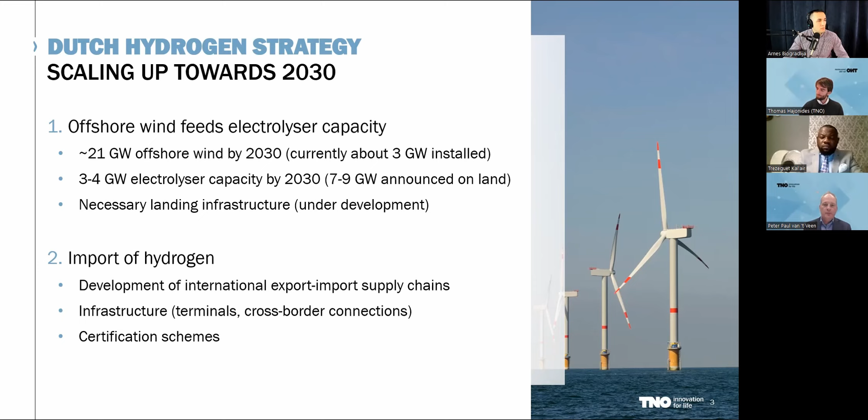This is not the only thing that has to be done. We have a distribution system for natural gas in the Netherlands at present, but already a start has been made to transform part of our natural gas pipeline backbone into a hydrogen backbone. This pipeline system will then connect the hydrogen production facilities and the harbors with the main chemical industry hubs in the Netherlands and even abroad.

In order to manage these massive investments in hydrogen infrastructure in a responsible way, it is necessary to align supply and demand carefully over time. For this purpose, a decision cycle between government, TSOs and industry is in place, with a central instrument being a roadmap for electrification and the shift to hydrogen for the Dutch industry as one of the main off-takers.

And this is all, of course, backed up again by schemes for legislation and policies, regulation, and also, of course, safety programs and education.

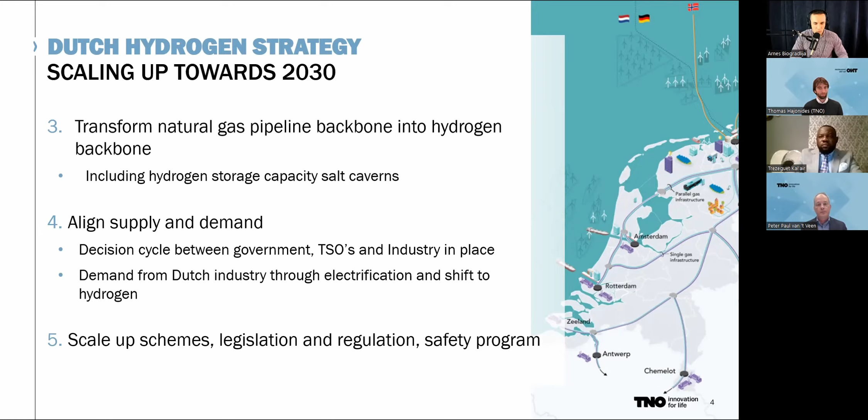At TNO, we have developed over the past years a broad portfolio of activities to support the development of a hydrogen economy. This picture illustrates that we are working in about six different programs and development areas which are aimed at specific parts of the value chain and address a specific target. So a central part of our portfolio is the development of advanced electrolyzer technologies, the hydrogen production in the center.

We are developing electrolyzer technologies with minimal or no use of critical materials and with the potential for mass manufacturing. High volume storage of hydrogen is of course also foreseen. As TNO, we perform research on hydrogen storage in salt caverns and abandoned gas fields. We are also working on the development of smaller storage facilities, for instance in vessels.

On the North Sea, we will have to convert our traditional offshore oil and gas production infrastructure. At TNO, we are working on the integration of hydrogen production with offshore wind and solar, where we try to make use of as much as possible of the existing offshore infrastructure. And just recently, we installed the world's first offshore electrolyzer on an offshore platform to get confidence in this type of technology and also to get experience with what it means to have an electrolyzer on an offshore platform and what comes with it.

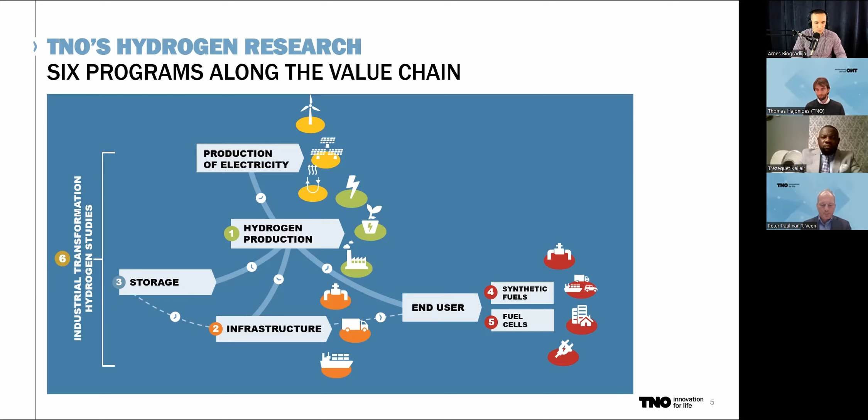TNO has a long track record in hydrogen research. It goes back for decades. Over time, we have invested in dedicated research facilities, both for research into electrolyzers, conversion and storage, and application of hydrogen in different domains. Examples are our Faraday lab for electrolyzers, our Stack Test Center, our energy storage lab, power lab for automotive, and our field lab for industrial electrification.

Over the past years, we have executed numerous research projects over the entire value chain, as I showed you before. And over the years, we have also executed more than 50 techno-economic market studies. So I would like to present a few of the research projects we have worked on recently or are presently still working on to give you some flavor of our activities in hydrogen.

So the first example is North Sea Energy. This is a shared research program, an R&D program on the energy transition and system integration on the North Sea. As I mentioned, we did install an electrolyzer on an offshore platform, but we are looking into technical options for linking offshore oil and gas infrastructure with wind, looking at platform electrification, opportunities for power to gas, opportunities for gas to wire, and also opportunities for storage and carbon capture.

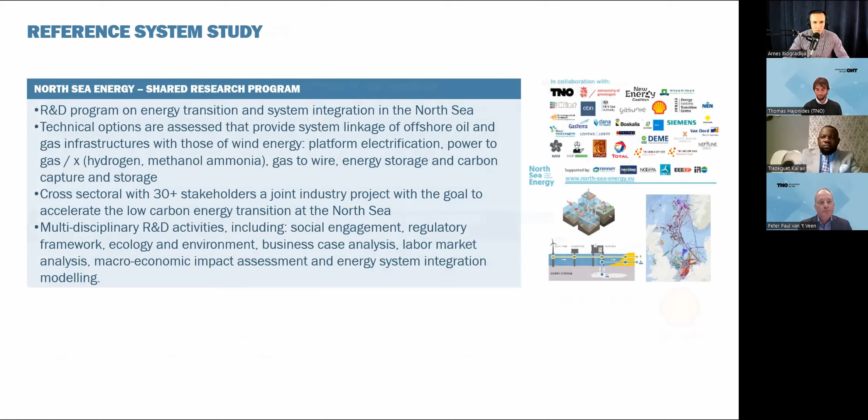Some other examples: the HY3 program. In this program, we work together with Jülich in Germany and dena, and we analyzed the potential of reuse of existing natural gas infrastructure between the Netherlands and Germany. This infrastructure is currently used for export of Groningen gas from the north of the Netherlands towards Germany, with production coming from green hydrogen from offshore wind electrolyzers at the North Sea. The vision is that in the future, the same pipeline system will be used to transport hydrogen into the Ruhr area in Germany. Again, this research is performed with 18 industrial partners from Netherlands and Germany, and this research is publicly funded.

Another example is NortH2. This is a large-scale hydrogen production from offshore wind and onshore electrolyzers in the north of the Netherlands. The project aims at developing, in the end, a 10 gigawatt offshore wind park in the north of the Netherlands with onshore hydrogen production from electrolyzers and transport via the existing gas infrastructure of Gasunie, the Dutch gas distribution company, towards major demand centers in the Netherlands and Germany.

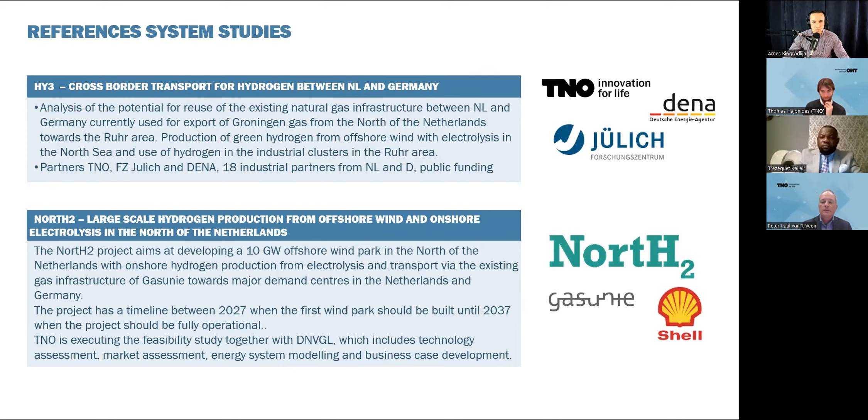And this includes technology assessment, market assessment, energy system modeling again, and also the business case development. Another example of where we are working on hydrogen production: together with a consortium of parties under the guidance of the Institute of Sustainable Process Technology, we developed a conceptual design and a cost estimate for a gigawatt scale electrolyzer plant. This plant should be ready for startup in 2030 and deliver hydrogen at a cost below the current cost levels for the manufacturing technologies.

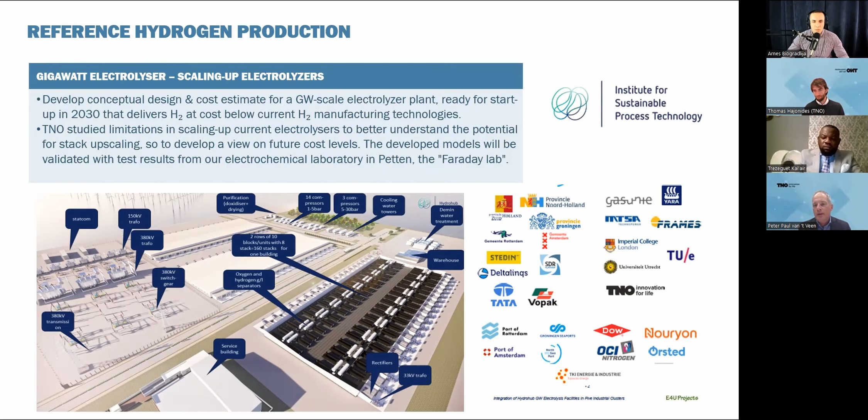The picture shows the possible layout for such a gigawatt plant. As TNO, we studied what are the limitations in scaling up the current electrolyzers, and we wanted to better understand the potential for stack-up scaling, to develop a view on future cost levels of such a plant. The developed models we have for the cost analysis of this type of gigawatt plant are validated with test results from our electrochemical laboratory in Petten, the Faraday lab.

Some examples of storage projects we have performed: one is HyUnder, which focuses on large-scale underground hydrogen storage for Europe. It's on a European scale, and we work together with institutes and companies from different countries in Europe. The project assesses the potential of hydrogen storage in underground salt caverns in this case. A benchmark is performed of large-scale seasonal hydrogen underground storage against other competing technologies, and we assess the requirements for below and above ground plants and the process technology required to operate such a storage.

Individual case studies on hydrogen underground storage are performed in France, Germany, Romania, Spain, the Netherlands, and the UK. It gives us really good insight into the present state of the art and potential of hydrogen storage in salt caverns.

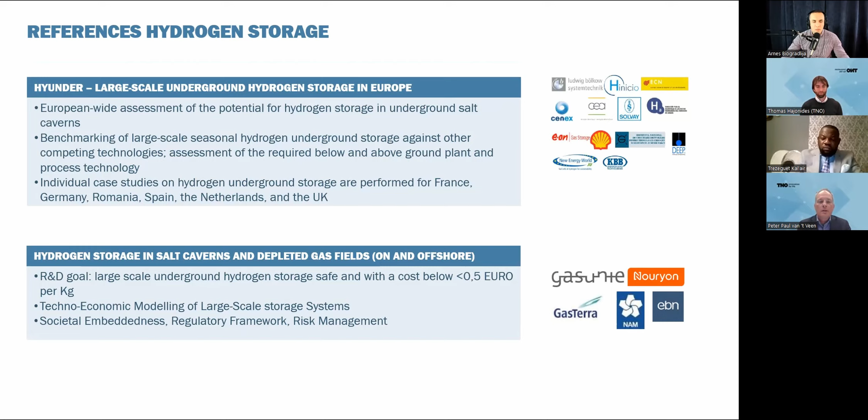Another option for large-scale hydrogen storage is in abandoned gas fields, and that is the second project. Apart from salt caverns, we also looked at how to use depleted gas fields on and offshore for storage purposes. Again, this is multi-party and multidisciplinary, where we also look at societal embeddedness, regulatory frameworks, and risk.

Some examples of power generation: going to the demand side, we have a very specific development. We know there is a possible application of hydrogen in trucks, and in the end fuel cells could be used there for truck use of hydrogen. But what we are developing in TNO is also a more intermediate technology, in our view, to use hydrogen for internal combustion engines. This could be an interesting intermediate step.

We're looking at combustion concepts, power densities, and the efficiency of such a combustion engine, with tests for both stationary and transient conditions. We look at what is the need for after-treatment if you go to hydrogen combustion, and you have to make adaptations in your fuel injection system. You also have to take precautions for certain effects if you go to hydrogen, such as crankcase ventilation and backfire prevention.

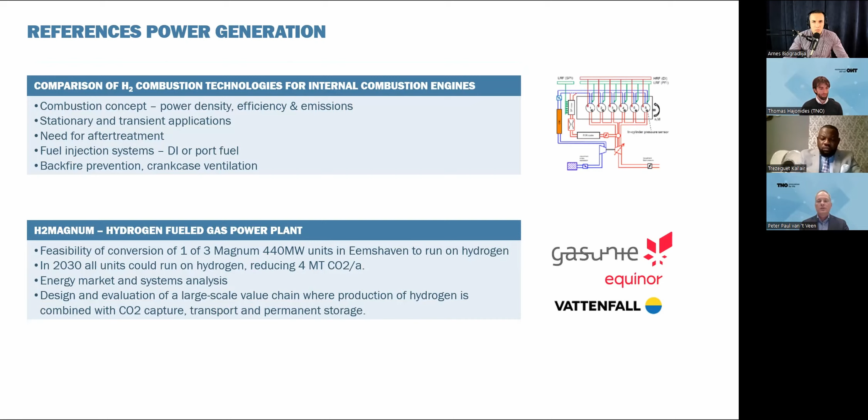So, to conclude, as the projects presented show, the development of industrial ecosystems is really vital in driving innovation in hydrogen. You cannot do this alone, you have to do this together. I would like to end this presentation by inviting all attendees to join forces, because it is our firm belief that only through large-scale and international collaboration will we be able to tackle the massive challenges we face in the time we have. Thank you for your attention.

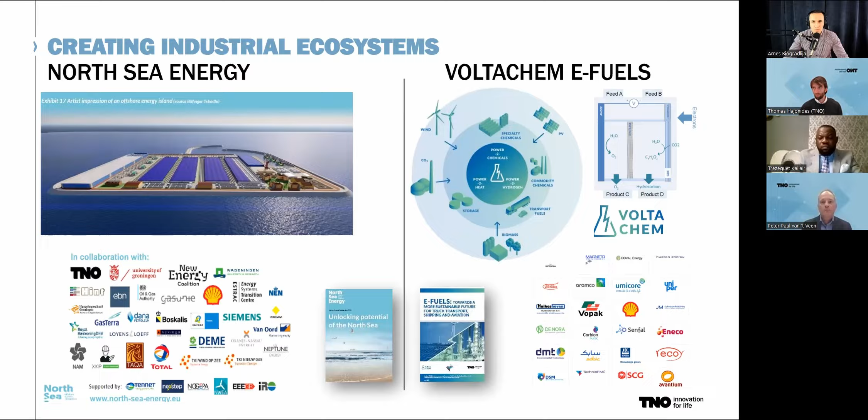Thank you for introducing me, and thank you for the opportunity to share some of our insights in hydrogen trade. I'll do so by not only sharing some general statements or insights, but also give you a teaser on very specific content insights that we created and came up concluding in the past few years of research.

My name is Thomas Hajonides. I work as a research consultant within TNO, and I work on a variety of topics that all boil down to supply chain complexity and collaboration. I'll share with you these 3 insights that I promised you.

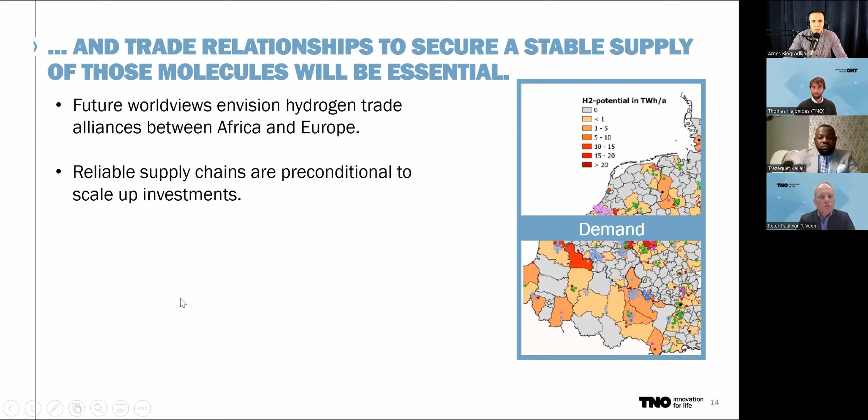mainly through utilizing offshore energy, harvesting through offshore wind turbines. But that will be an intermittent profile, as well as perhaps not cost competitive enough when compared to African imported hydrogen. Therefore, a reliable supply chain is crucial for investment decisions.

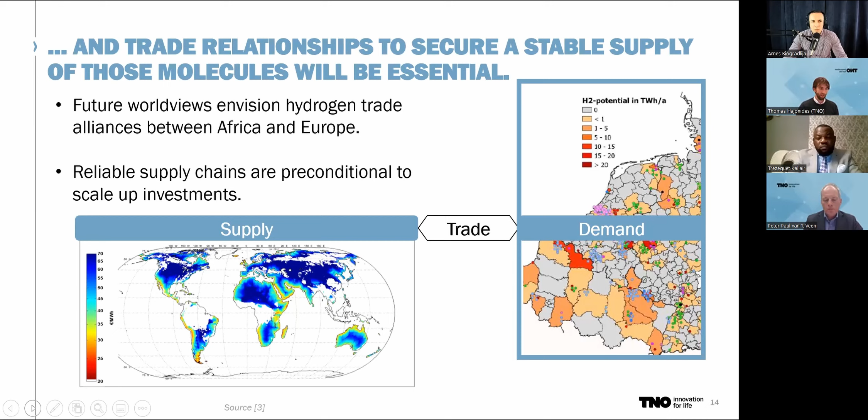What is also important is to realize that when talking about hydrogen, we're not talking about hydrogen molecules only. We talk about ammonia when hydrogen is combined with nitrogen. We talk about methanol, a commonly used molecule already. We talk about, for example, liquid organic hydrogen carriers as a means to transport the hydrogen. But we also can talk about importing hydrogen-based molecules like diesel, kerosene, ethanol, and other commodity scale trade streams.

It's important to realize that when talking about hydrogen trade, we may actually mean methanol trade, or we might mean synthetic kerosene trade. So in my future 3 points of interest that I want to share with you, I will talk about hydrogen, but please be noted that other types of hydrogen-based molecules can be inserted as well.

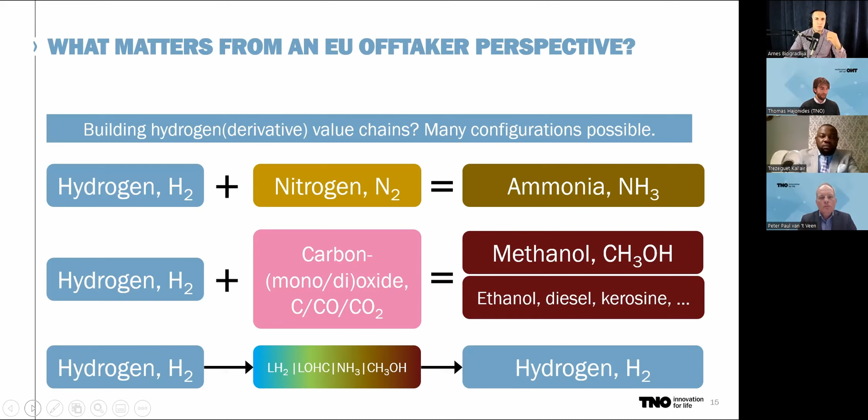When talking about hydrogen trade, we need a supply chain. Obviously the supply chain can be covering, for example, the production of hydrogen, the logistics, as well as the end demand centers, but it can also be stretched towards end use, and then we would need to add intermediate distribution as well.

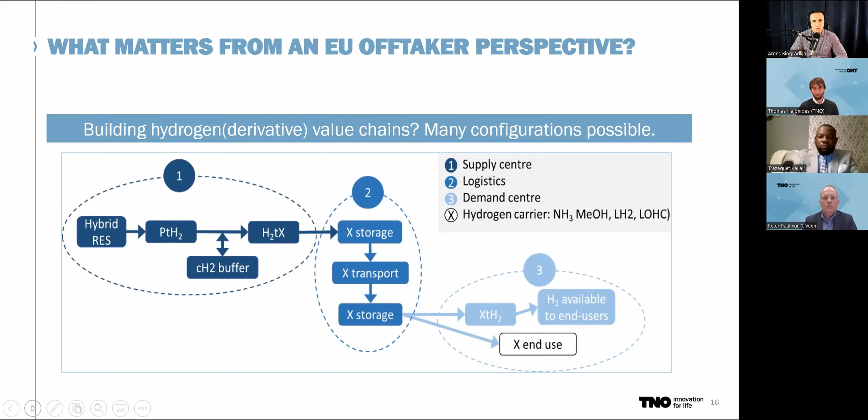As Peter Paul has introduced to you, the Netherlands is an excellent location for importing large-scale hydrogen and then feeding or distributing it towards other European countries. But I will focus only on trade up to the Dutch industrial sites where large-scale storage is possible. The distribution beyond, I've left out of scope.

The 3 topics of interest: I'll talk about the essential role of security of supply for the Dutch and European off-taker perspectives, also about carbon intensity and about import cost. We believe that these 3 items are crucial in establishing trade relationships.

Let's start with the security of supply. As I mentioned before, import may play a crucial role in flattening out intermittent local hydrogen production profiles. It is much appreciated if that hydrogen filling these gaps is available when European industry or other off-takers need it. We will need a lot of logistics optimization for ship transport to operate and arrive right on time. But that is not the security of supply I will be discussing. I will be discussing the combining of different production assets for hydrogen.

That would start with a reliable supply of renewable electricity. An example there is the opportunity to use the land available in African countries, combined with different technologies that are most suitable for harvesting that renewable electricity, and combine those.

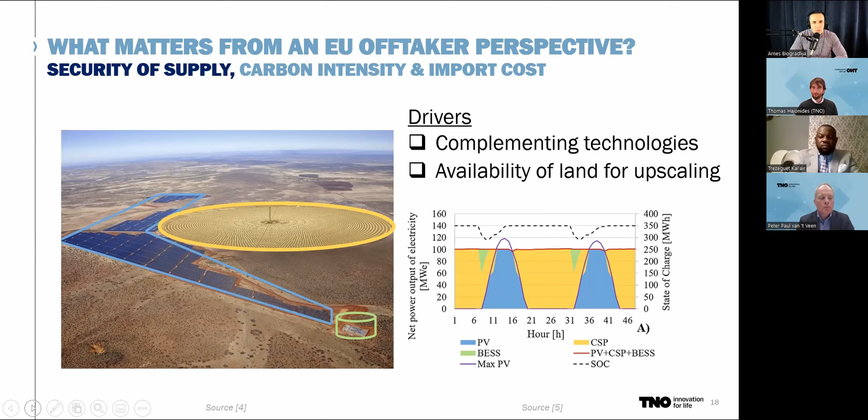Transferring to hydrogen, to carbon intensity as a driver or point of interest. It should be noted that we do not have clarity on the specific certification schemes yet, but let's assume that we should not use fossil power to power green electrolysis production.

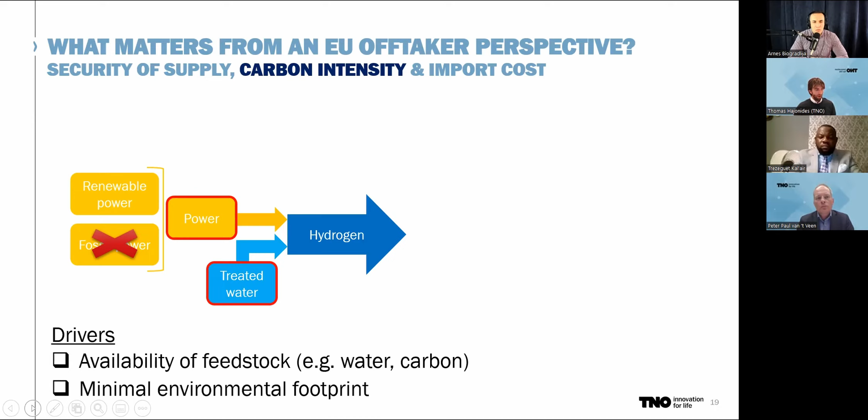But we do need treated water, and we also need, if we want to make carbon-based molecules, a carbon source. These are different feedstock flows that are critical, and you could transfer the security of supply point raised to this topic of interest as well.

But I want to address only the carbon intensity attached to the molecules that are in the end imported. It is crucial that the carbon intensity of these imported molecules is as low as possible to comply with future legislation and decarbonization targets.

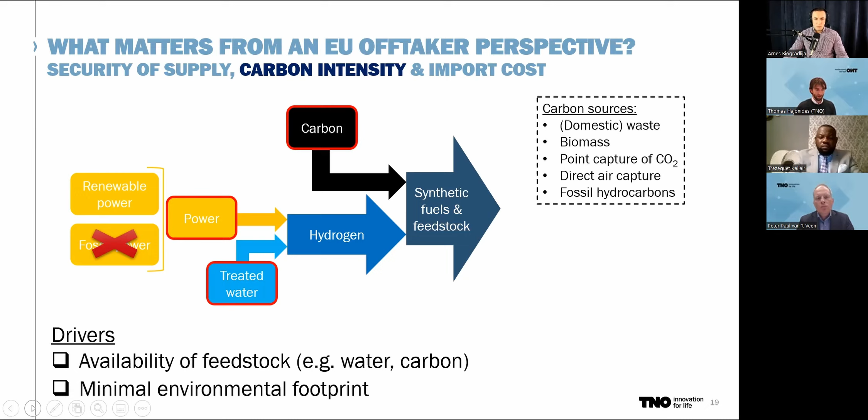The last point to share with you is the import cost. The commonly used term for this, levelized cost of hydrogen, is built up from the costs for each supply chain element individually. By dividing the total amount of costs with the total amount of tons of hydrogen over the life cycle of all the assets, we arrive at certain cost indications for hydrogen import.

And what we see is that many different countries will be competing with each other on their lowest levelized cost of hydrogen. Important as well on this topic is that there are many drivers for this cost that can drive it down or up.

Major cost drivers obviously include the cost of renewable electricity, but also economies of scale effects can drive down these costs. As previously mentioned, large-scale projects might be feasible to develop in African countries, giving countries in Africa a major advantage over other countries around the world.

The last disclaimer on this topic is that if the hydrogen market becomes a commoditized market, the lowest cost production regions will simply be the regions that benefit the most from market clearing mechanisms, which means there will be a clearing price for hydrogen on a global scale.